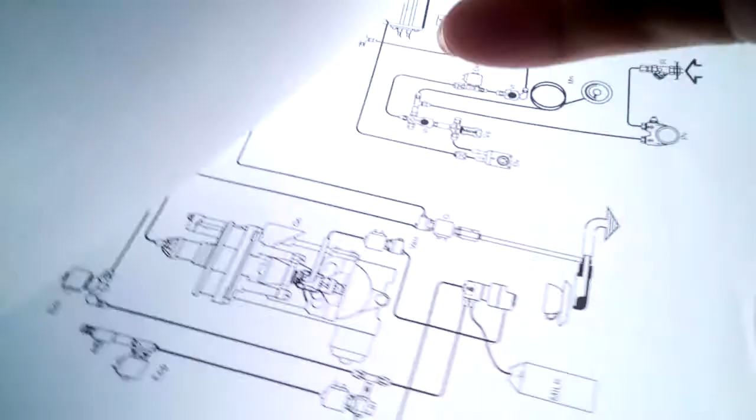This video is for the La Spaziale S50 Dolcevita line, and we're specifically talking about the tea wand or hot water tap.

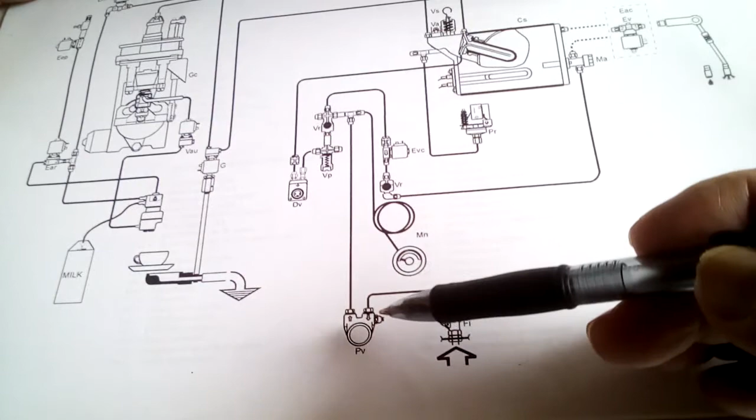Okay, so as this diagram shows, water comes in and goes through a pump, is pressurized up to about 9 bar, and it hits this water flow valve, which allows the cold city pressure water that's been pressurized by the pump to go through, and it goes through a small filter here and then goes into the economizer. That's this MA over here.

Now the economizer shoots cold water into the boiler, which gets heated by this heater element and then boils, and of course there's a pressure switch that controls the boil rate and what pressure it goes up to. Okay, but once the water is hot, cold water comes in here, and it also mixes. This device also allows a mix of cold water from here and hot water from the tank going in here.

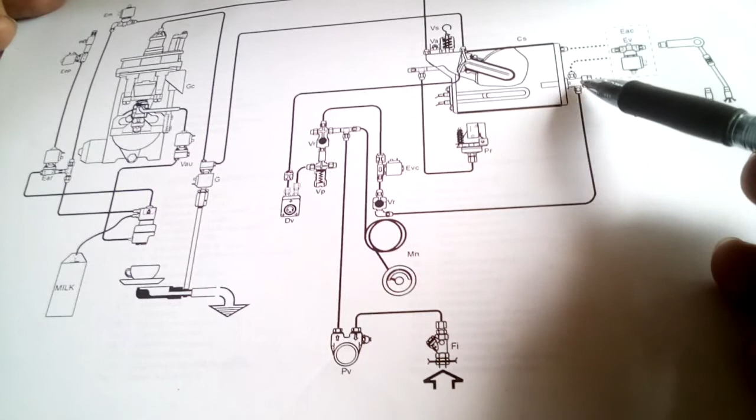And what happens is when this water valve is open, so it's the pump pressure coming up into the tank, water goes in here, but also this tube also sucks hot water from the boiler. So there's a mixing action in here, which is adjusted by the MA or the economizer, and the mixed water will come up here and go out to the hot water tap.

So it shows this long nozzle, but in actuality, in most cases, it's a small spout, okay, which may or may not be on a hinge as shown here. It may just be a pipe coming out here and just straight down to a spout.

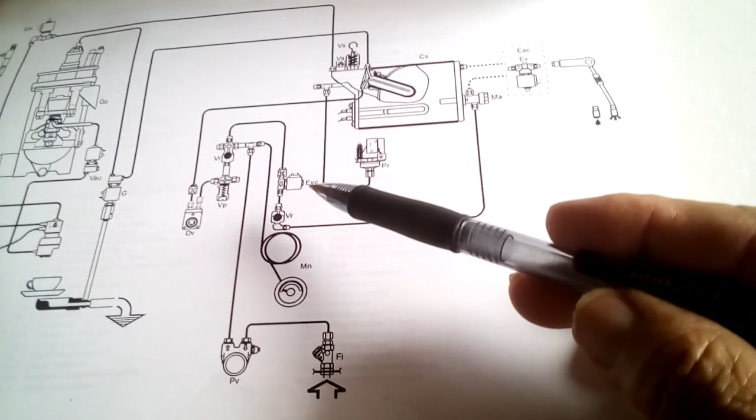So these two valves, the EAC and the EVC, the cold water inlet and the hot water outlet valve, have to both be activated. So there's a good chance that in some systems this may be paralleled off. If this valve is activated, that valve is activated. But there has to be some kind of cutoff device to prevent this valve from opening if this valve is open.

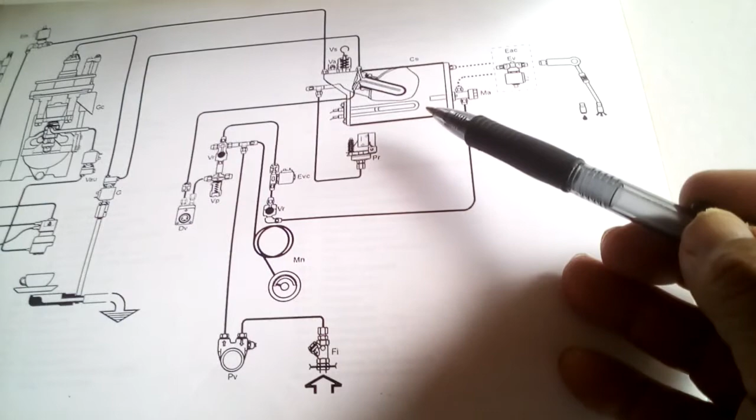So there's a separate circuit that operates just the cold water inlet. So this allows, when the service boiler is low on water, this valve opens up and then feeds water in. Okay, so there's a separate circuit that controls this. So what happens with the water here, okay, I'll show you in more detail.

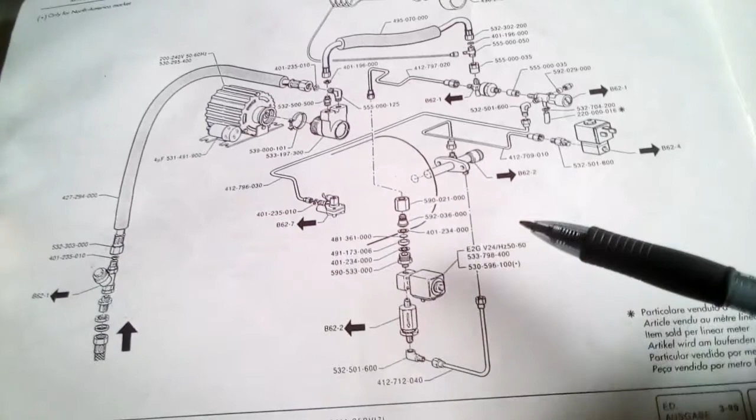Okay, this is what it actually looks like. So here's the water inlet valve. As you can see, it comes in. Here's a pump. Cold water comes in, gets pressurized, goes through a one-way valve, check valve right here, and then goes through a pressure regulator, which is adjusted to maximum 9 bar.

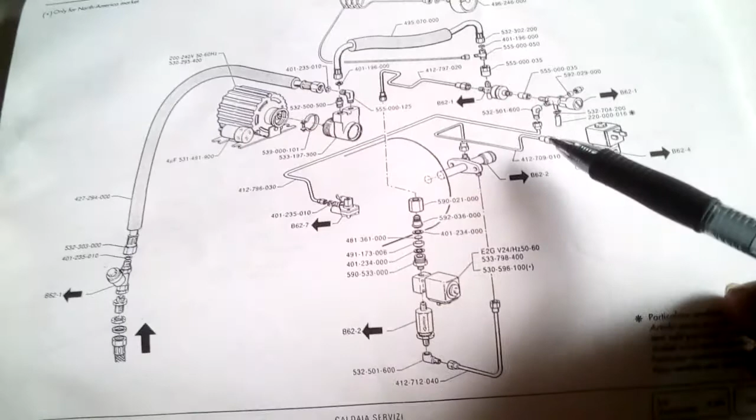Then it comes down, and the output of the water, pressurized water, goes into this filter, filter screen, and then cold water inlet valve, another filter, and up into the economizer.

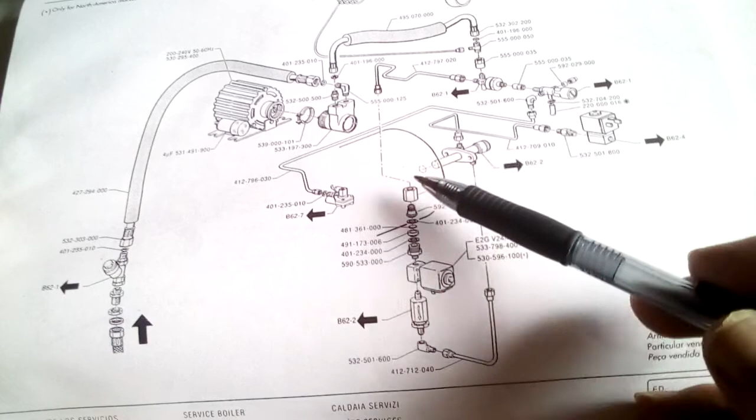So the economizer is buried in the tank with hot water, and then it mixes hot water with cold water, and it comes out of here and it goes straight to the T1 valve. Okay, now from the T1 valve, it says go to B62-4.

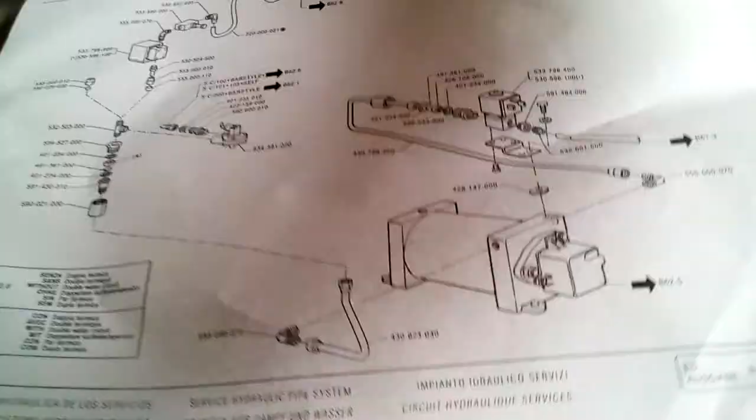B62-4, and as you can see, it just goes straight to the valve, and then from the output of the valve, it goes to various connections depending on the machine. This is like in a bistro, okay, where they remotely, this is a hose that they mount the spout on one of the frames of the bistro.

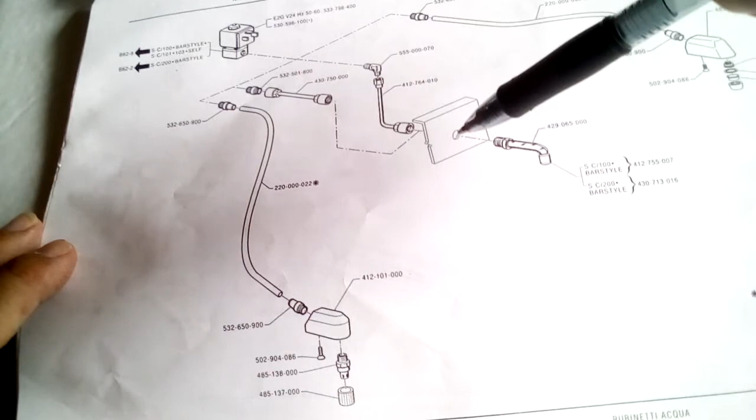This is a more direct connect that attaches straight to the spout. There's a faceplate that goes on the M50, and depending on the model, the faceplate might be a little different depending on where they have the spout, because sometimes they move the spout around here and there.

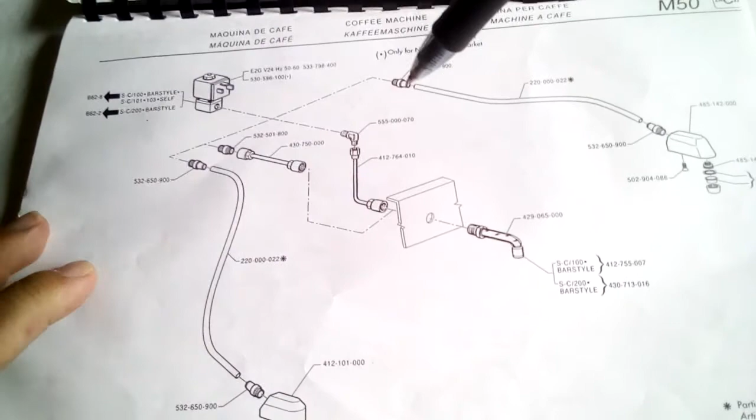Typically it's on the right side of the machine, but it may be moved to the left side of the machine. So depending on where it's moved to will depend on what kind of pipe you have. So this is a direct connection. And then you have a longer one, again, if they're moving the spout to another location. This particular one has an aerator attachment,

and so depending on what your needs are for tea, there's different schools of thought whether you want straight boiling water or you want a mix of tepid water or you want aerated water. It just depends on what the customer wants. So they can offer 3 different types of hot water: boiling hot water, tepid hot water, or aerated hot water. So it just depends on the customer. Okay.